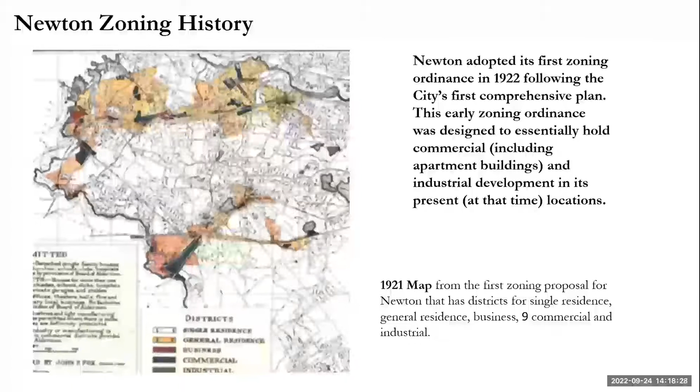Next slide, please. From when Newton's first zoning ordinance was adopted in 1922 through about 1950, Newton's population nearly doubled from 46,000 to 82,000 people. This rapid growth led to two major zoning overhauls.

Phase 2 is where we are today. This phase involves looking at the zoning update proposals that city staff drafted based upon the values identified in phase 1. In addition, the zoning and planning committee of the city council evaluated this and came up with proposed updates, which are the resulting proposals we're going to be talking about in this meeting.

The next step will be phase 3, scheduled for winter 2022. Based upon community input on these updates, zoning ordinance language will be drafted, which will then be considered by the zoning and planning committee. They'll vote on whether to approve this language.

If approved, it will be passed on to the full city council to vote on. If the full city council approves that, the new zoning language will become part of the zoning regulations and be what needs to be followed going forward. So that's an introductory overview to set the stage for what we're going to talk about next.

And I'd like to turn it over to my colleague, Raina Getz.

Hi, everyone. Can you hear me? I hope online you can hear me.

The first step I wanted to do was present some zoning terminology so that everybody is on the same page in terms of what I say, so it's not a question later. We are going to post all of this information so that you can go back and refresh and reinterpret or understand what's being presented.

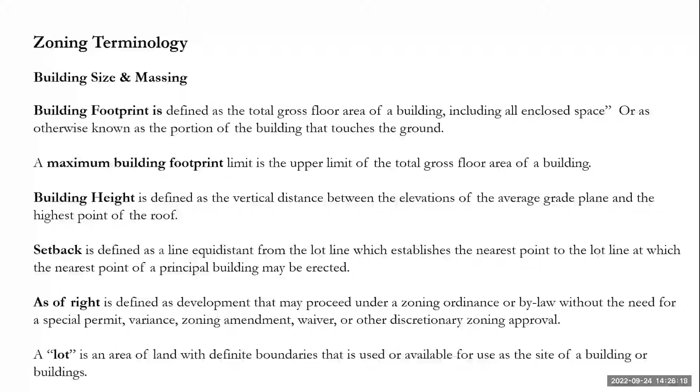As of right is defined as development that may proceed under a zoning ordinance or bylaw without the need for a special permit, variance, zoning amendment, waiver, or any other discretionary zoning approval. And a lot is an area of land with defined boundaries that is used or available for use as the site of a building or buildings. That actually comes from the DHCD definition in the final guidelines.

Another term that's really good to know is floor area ratio. It's the ratio of all building gross floor area divided by the lot area. It's a metric for regulating the number of square feet that can be developed on a parcel without specifying the exact shape or size of the structure. In the example below, it's a FAR of 2.

This means that a building can be twice as much in gross floor area as lot area. I really like this diagram because it shows that this is almost like a form that you can either have long and wide, square, or tall and vertical. So it's an interpretation of what you can do with building massing, but it can take many different forms.

The gross floor area is the total square feet of all of the floor areas in a building plus other floor area that's designated to count towards the total. It's well defined in our ordinance, and it's very specific about what does and doesn't count.

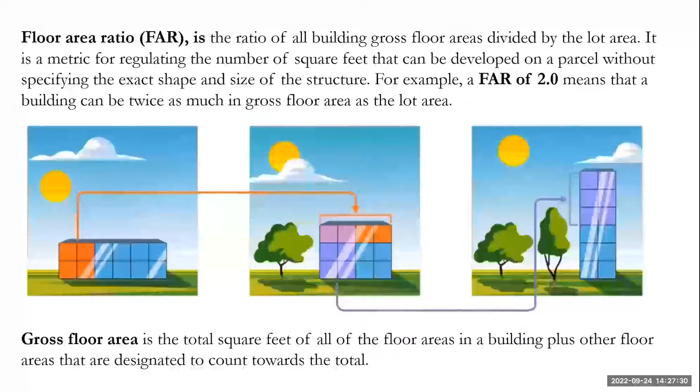The development standards, which we will talk about, determine the overall size, shape, and location of a building or buildings that a property owner can develop on their lot. These standards form the nuts and bolts of any zoning code, and they're meant to promote positive outcomes for the community. Our zoning ordinance is right now under consideration to incorporate these new standards.

They are rules, they're actually our land use laws, and they affect all projects in any zoning district in much the same way. They will regulate the overall building height and mass, but do not regulate architectural style. It basically creates a framework with specific constraints that the design and creative process must work within.

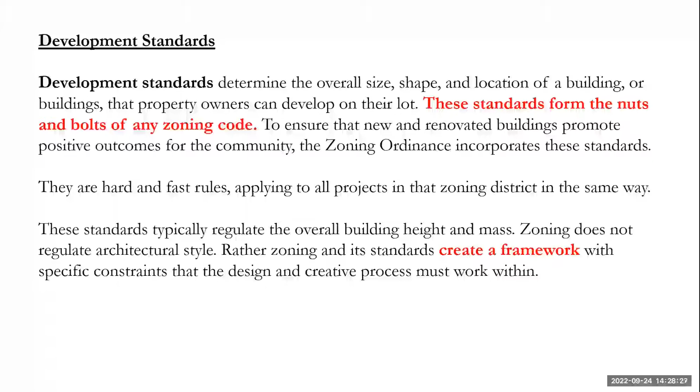So what I'd like to do is cluster each of the proposed zoning framework proposals. I'll first discuss building design, then move on to lot configuration, the review process, and end with parking.

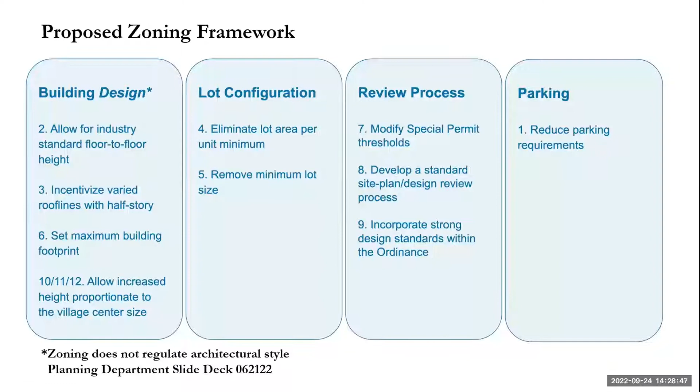The first thing that was considered was getting to an overall industry standard for floor-to-floor heights for residential as well as commercial uses. Currently in your BU1 and BU2 districts, it's a 12-foot floor-to-floor height. What's being proposed is, I thought it was 11, but in the document, yeah, it's here. And in all the documents, it's saying it's 12.

But in the zoning and planning committee, it was 11. So we'll figure that out later. For commercial, it's 13 feet, and for commercial on the ground floor, it's 18 feet.

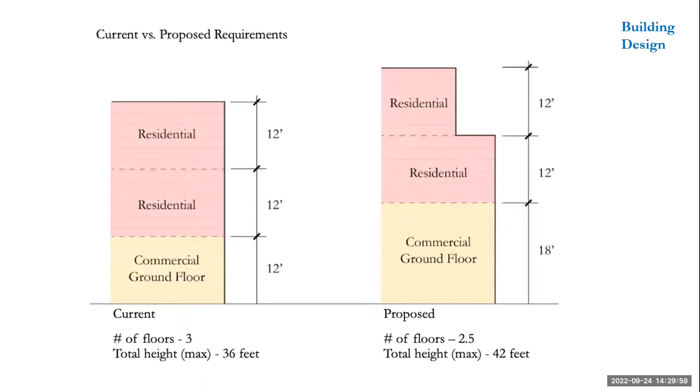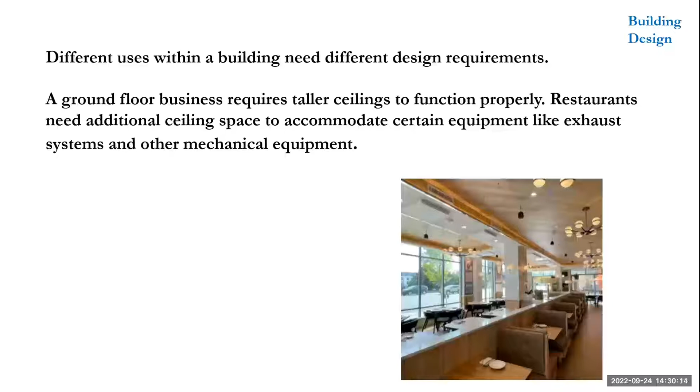Many businesses, many restaurants and bookstores, require taller ceilings to function properly. There's an equipment need, like exhaust systems and other mechanical equipment that needs to be housed up above. So that's the ask for the change.

The next piece, one of the framework proposals, was to incentivize varied roof lines with a half story. They're suggesting that currently in Newton, we have a lot of flat structures, and this is due to the whole numbers of either being allowed to create 2 floors or 3 floors.

So now they're proposing the max height as a half story. It could actually be 2.5 up to 4.5, but it apparently will allow additional flexibility, and it also will allow for a setback.

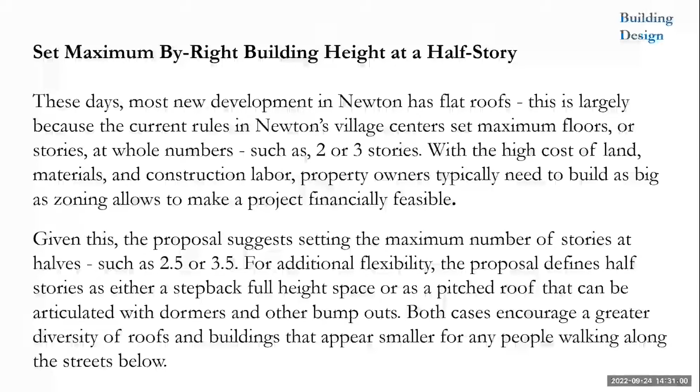This picture actually does a better job of describing it, so you can see this used to be 10, now it's 7 as the setback, and these are all the parameters for a half story, whether you have a flat roof or if it's pitched.

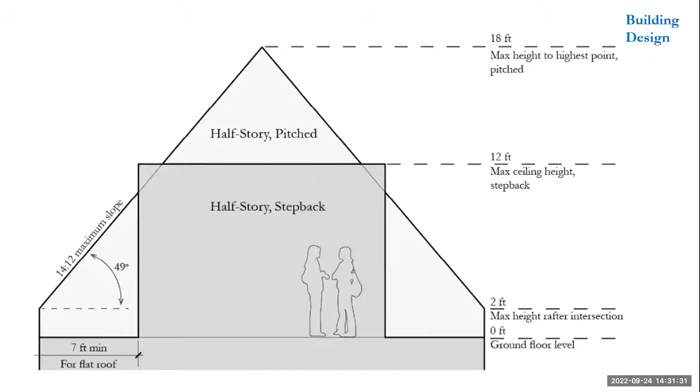This is what it looks like for the BU3 example. It's saying the step back is a requirement. So you can see this is the BU3 example with the first 3 stories at 38 feet and then an additional half story, taking it up to, looks like 50 on this diagram. So it's 3.5 stories.

They're saying that it allows for diminishing the building massing by pulling it in. It's also saying that it allows for more light and air to the street, and it creates a usable terrace space up on the roof.

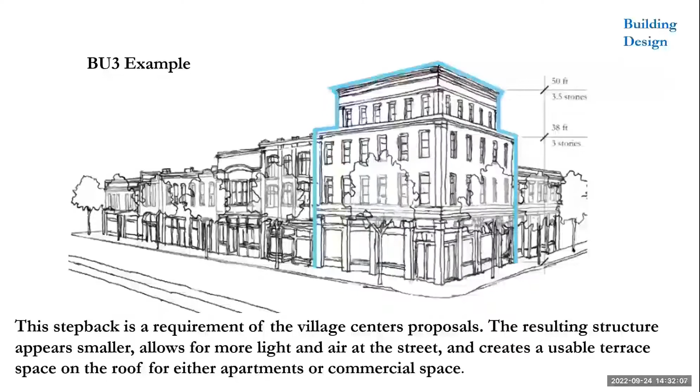So this is what's being proposed: to increase the height proportional to the village center size. And this is a bar chart showing what is being proposed.

It shows that currently the orange is in BU2 and BU1, that by right you can have 2 stories, but with special permit you can go up to 4.

I wish I had a pointer. But what's being proposed is for the BU2 revised district, it's going up to 2.5 by right, and up to 4 stories by special permit.

Now, in a medium village center, you can have both the BU2 and the BU3, and the new residential district will allow a by-right structure at 3.5 stories high. And then lastly, the MU4 will allow the BU2, the BU3, and the MU4. You can see that the allowable by-right height, story height, is 4.5, and then by special permit it can go up to 6.

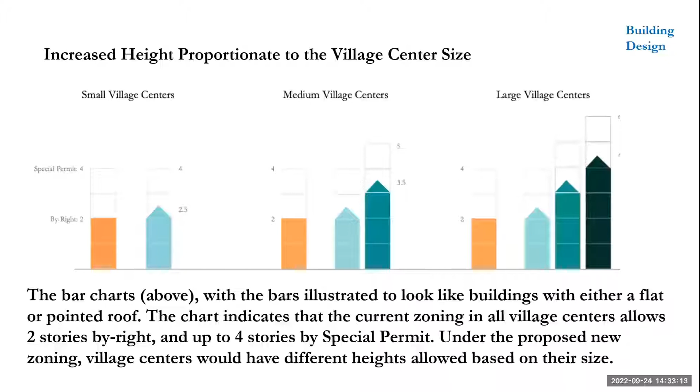6 stories - oh, sorry, 6 feet. Thank you, and I want input.

No, I'm just saying, Pam Bright is right here next to me, and if I say something that doesn't sound right, please interrupt. She's on the zoning and planning committee. All right, just so everybody knows.

You might also want to talk about which village centers are coming in. All right, so the proposal is to create 3 new village zoning districts, which will establish a zoning framework.

This framework allows for small, medium, and large scale development appropriate for the size and attributes of each of the village centers. I'm going to go through each of them specifically, but you can see when I talked about FAR allowable, now that the BU2 and BU1 has an allowable by-right FAR of 1.5.

So the smallest ones with the BU2 revised zoning district - this is currently, from the city's planning department documents, designating 4 Corners, Newton Upper Falls, and Newton Lower Falls.

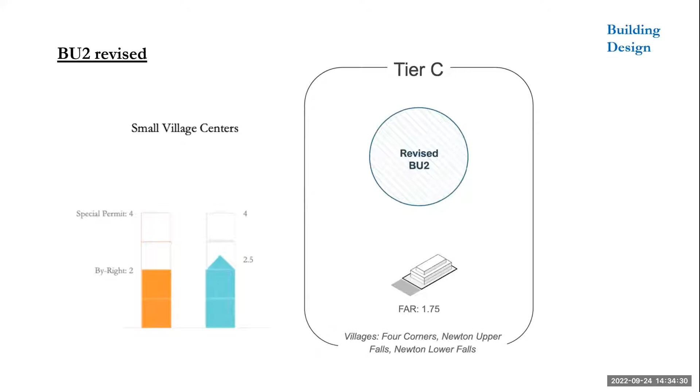And this is what it looks like in terms of the schematics coming out of the documents. You can see the by-right development is 2.5 stories, with the building footprint identified, a maximum building footprint of 5,000 square feet.

To understand this a bit, we have not been given any other dimensional controls like setbacks. This is a maximum. So what's going to shape the building in terms of its footprint would be other dimensional controls like setbacks and also open space requirements. Those haven't been identified yet, so we are kind of in a suspended state about those.

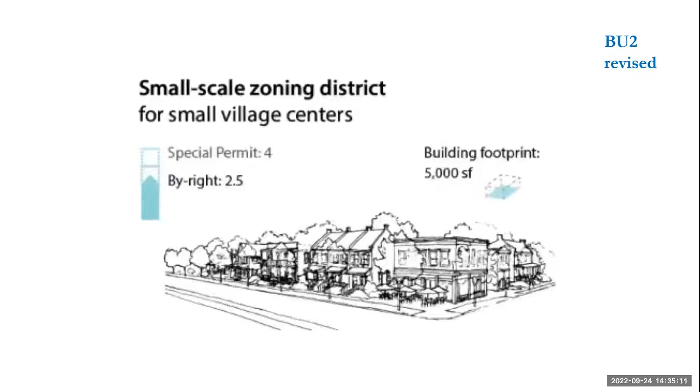Okay, here are some images that they presented in terms of by-right. Here we have our strong block, which is an old 2.5 stories. What's wrong, you can't see anything?

Okay, here's the BU3 revised, and we have a new residential district right here in the darker turquoise with additional FAR heights of 2 and 1.75.

And the villages that have been identified to have both the revised BU2 and the BU3 would be Nonantum, Highlands, Auburndale, Waban, and Thompsonville.

Just a question - no, can we hold the questions till the end, please? No, that's right, good question for clarity.

Okay, and we can look at the city council here. Are the maps of where they're actually proposing this available? Because I just did a survey this week, and they're asking citizens where we think this should be, so I'm a little confused by what you said.

So they just repeat this question so they can hear it. Okay, so I think that - do you want to restate your question, Mr. Powdermaker? Yeah, so this is Dan Powdermaker.

I was unaware that there actually was information from the city about where they are thinking about making the various villages. The survey that's available to citizens is actually asking us as residents where we think it should be, and I just did it this week, so is this map actually available, or are we speculating?

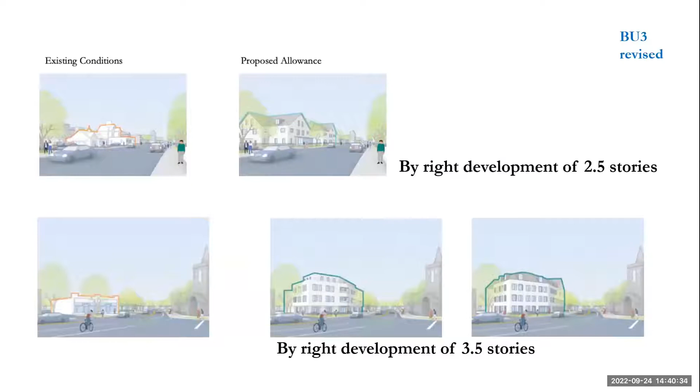This is a descriptor of what by-right development looks like in the planning department documents, 2.5 versus 3.5, shown in orange versus turquoise in the schematics. The BU3 revised has a maximum building footprint of 10,000 square feet, so you have your BU2 and BU3 by-rights. In this village, the BU3 will allow—the special permit process would allow a 5-story building.

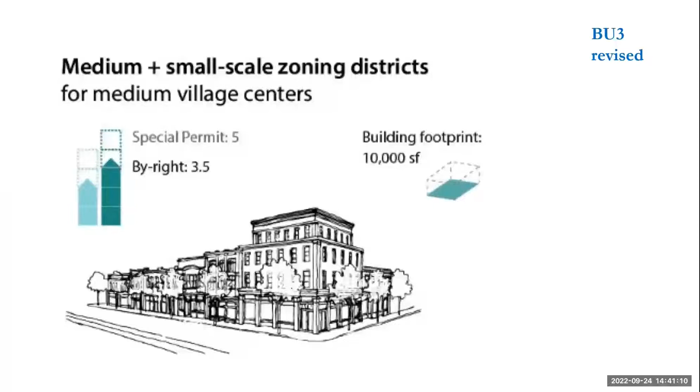Let's skip this one and go to the MU4 revised. The village centers identified preliminarily in the zoning and planning committee meeting were Newtonville, Newton Center, Newton Corner, and West Newton. Now we have an MU4 district at 4.5 by right and special permit up to 6. Here are the schematics of what that looks like, the bottom two, but you can also have the BU3 and BU2, the upper one.

Let's go down to what's at the library. Let's keep going, next.

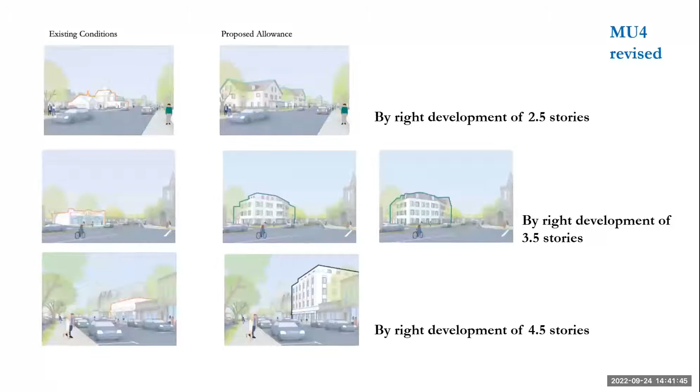This shows how additional height can reduce the overall cost of housing units. This is another piece we need to talk about, inclusionary zoning ordinance. The MBTA Communities Act has a bit of an override on this, but at this point, just know that more units means more deed-restricted units, and if you go up, you can put more units on a lot. Comparing the two formats here, there's a fourfold increase.

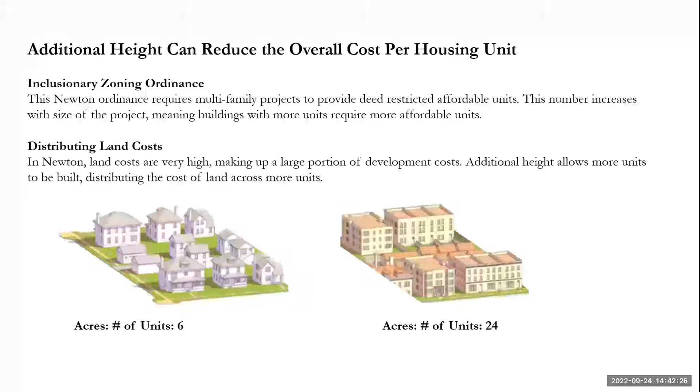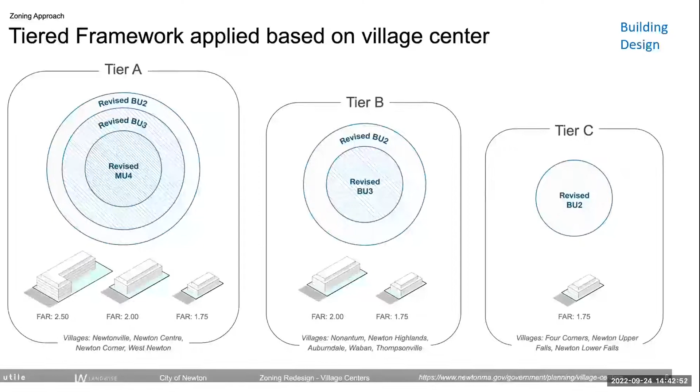Overall, next is the summary slide about what's allowed in each district, going from right to left: the small, tier C; the middle, tier B; and the last, the largest, MU4 as tier A. You can see the increase in FAR, and also the number of stories. This next one is good because it has it all on one page, showing the existing allowable floor heights, the footprint, and the FAR values.

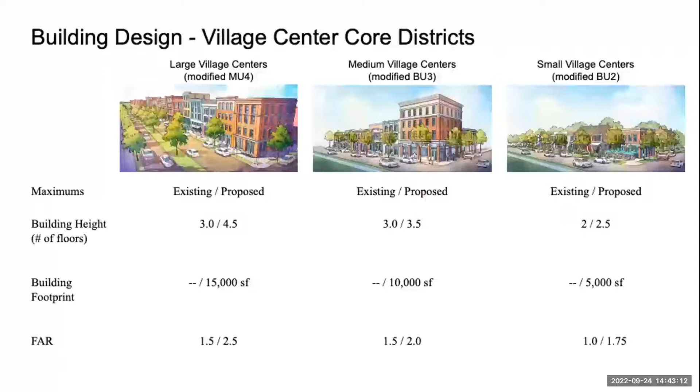Okay, by right, this is all by right numbers. And this is another schematic with more specifics in it to review at your pleasure.

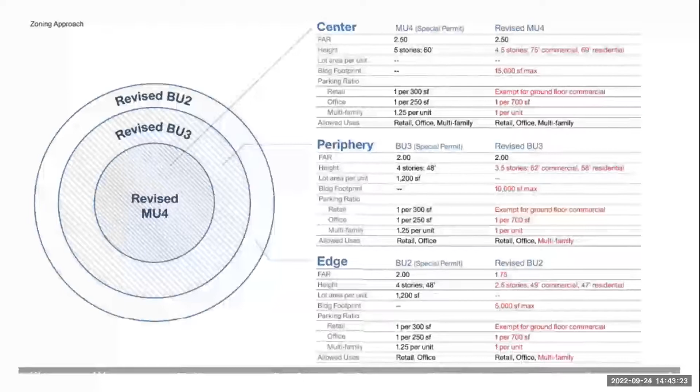So let's go into lot configuration. All right, so they removed the minimum lot size. This is another grouping in terms of zoning proposals 4 and 5. The first one, number 4, was eliminate. This is actually number 5, remove minimum lot size.

Right. Okay. All right. But what they're also saying for Trio in Newtonville, they had to aggregate the lots in order to create the building that they wanted.

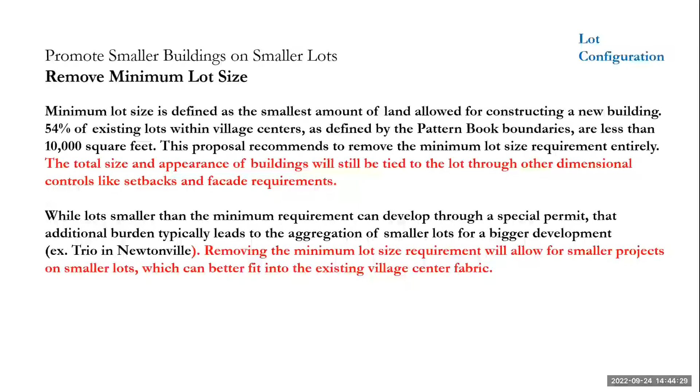So stop. So the other thing for the lot configuration proposals was to eliminate the lot area per unit minimums. So in the current proposal, it's being eliminated. What it's saying is that by doing so, you will have the ability to put more units into the structure.

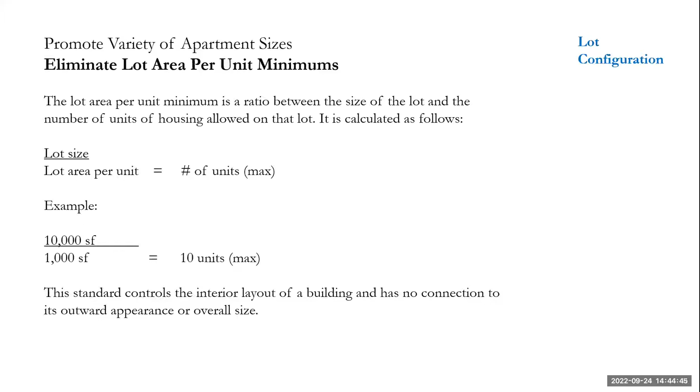Okay. And this is the next point - the lot area per unit is one of the multiple existing standards that control density. Floor area ratio, the FAR that we talked about, is another density control. However, these two density controls are not linked, which leads to a disconnect between the overall size of a building and the number of units contained within. And that's an important concept to hold on to.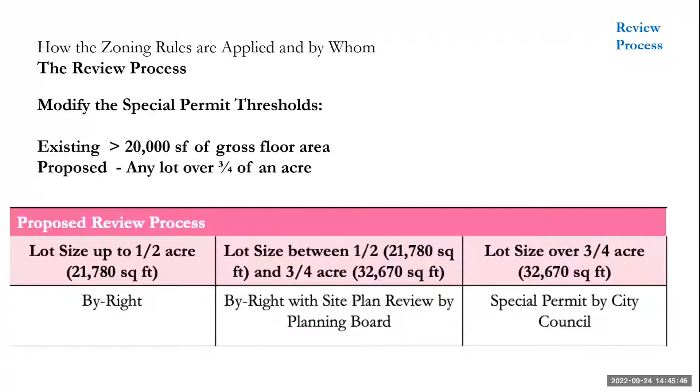Okay, and then finally, incorporating strong design standards within the ordinance. This is important because design standards can help establish clear and consistent criteria, applied consistently. They utilize a common vocabulary of terms and concepts through diagrams, charts and images, and they provide practical guidance with clear expectations for property owners, designers, and community members.

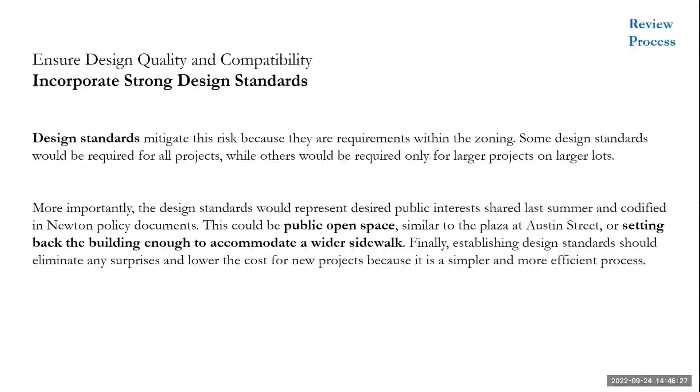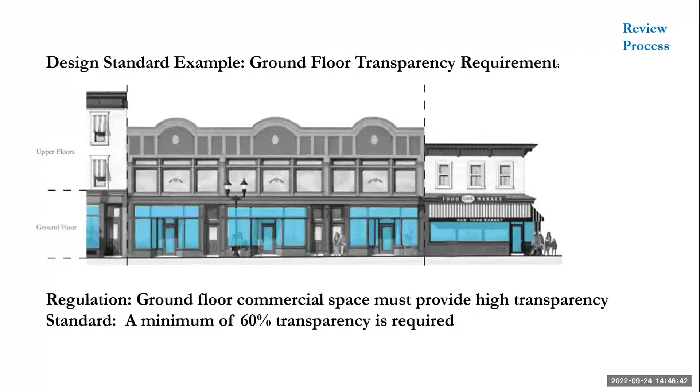Okay, and then the next piece is showing examples. This is a regulation that the ground floor commercial space must provide high transparency, with a minimum of 60% transparency required. And here's some Watertown examples.

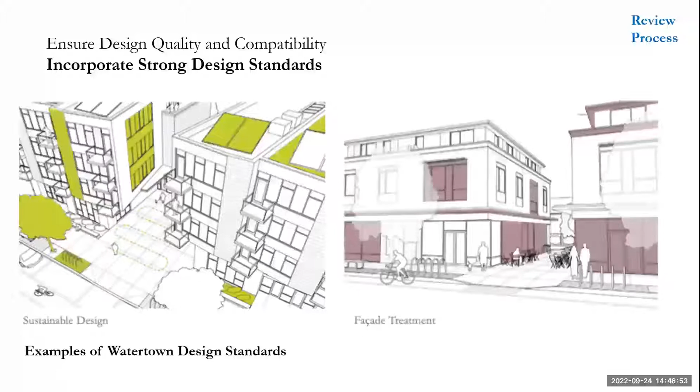You can make the design standards consider sustainable design, a facade treatment. It can also control the public realm and open space, or parking and access.

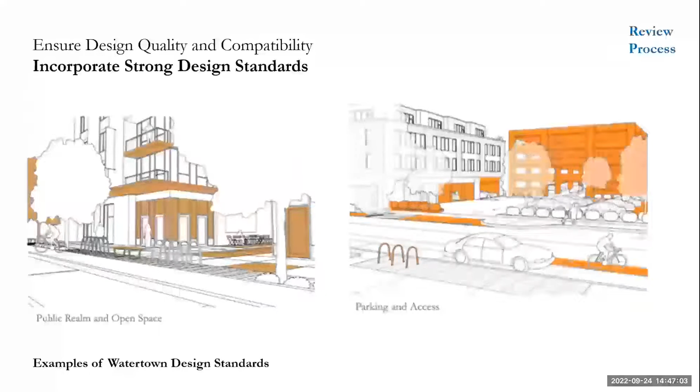Okay, and then lastly, let's talk about lower parking requirements. These are our local laws that require private businesses and residents to provide at least a certain number of off-street parking spaces. It's based on the individual use.

An example is new apartments. You can require a number of spots for residents, and new businesses for their expected customers and employees.

And this is the first time we're seeing more specification about the use and what's required in terms of parking requirements, so this is something you can review later. And then the concern, next slide, is - where is everybody going to park?

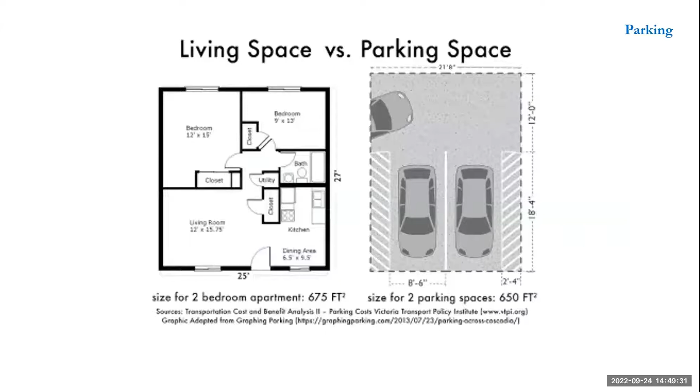You can see that there are possibly other transportation options, depending on where we get with the commuter rail and the T. Another really important point to consider is that your parking space can become living space, and with the accessory dwelling unit conversation right now, this is something to think about.

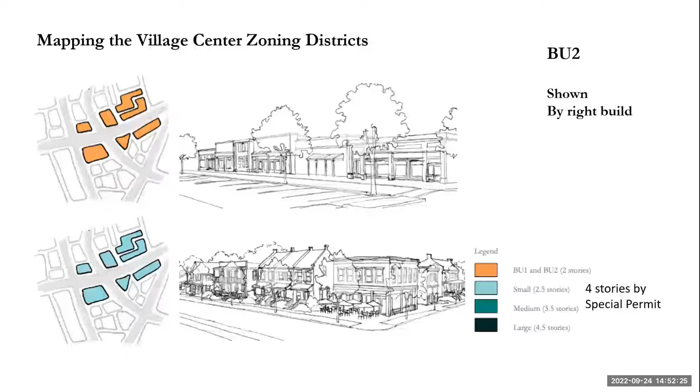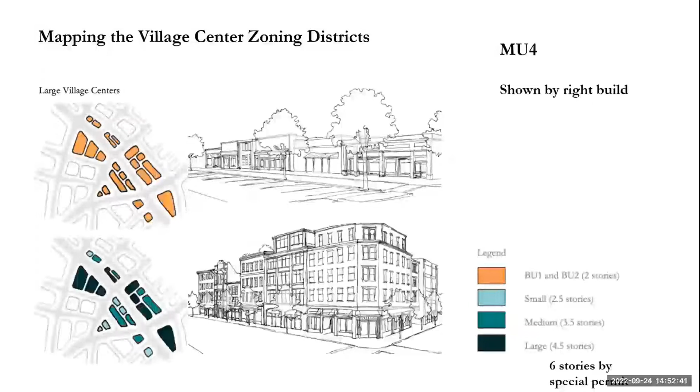Okay, so here's what they're doing, this is up at the library. I don't know if you guys have seen this, but it literally looks the same. The orange is what's existing and the blue is what's being proposed. So it hasn't bled out into the community, it's staying within the framework of those defined village center boundaries. If you flip through, it's the same for each one. We haven't had any presentation to date of anything outside the framework defined by the pattern book. This is what's up at the library right now.

Okay, so let's talk a little bit about mapping in the MBTA Communities Act. This is actually something zoning and planning is going to consider this coming week. I'll just do a high-level fly-by since we still have information yet to gain from this process with the city. But if you read this, it was part of the economic development bill signed by Governor Baker in 2021, requiring zoning for a minimum gross density of 15 units per acre.

That designation must not have any age restriction, it needs to be suitable for families, and within a half mile of the T or commuter rail. We are considered a rapid transit community, the highest designation, so we need to provide zoning for 8,330 units. Each zoning district needs a minimum land area of 50 acres, and 90% of those designated areas need to be within a half mile of the transit location.

Sure, I'm gonna go, all right. So,

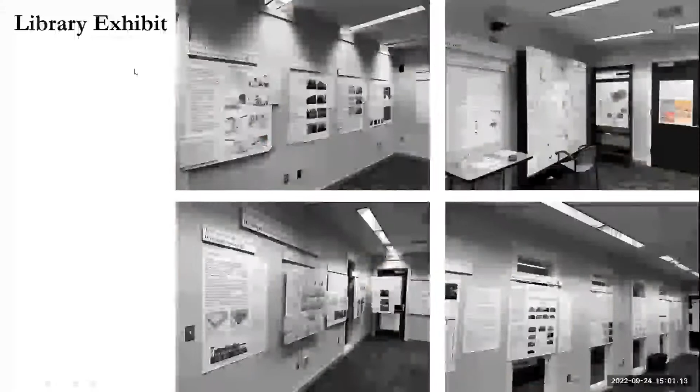So it takes up the entire room. As you come into the first part, you see on the upper side there's a map. This is the map they have up, showing the pattern book definitions of the village centers.

And these are the people who have gone to see it. It's not really clear whether you're supposed to put your pin on where you live or what village center you identify with, but everything seems to be clustered in the village center, so that's what people are interpreting to do. We have a lot of representation there from the village centers represented here.

So that's good. If you go to the exhibit and don't really understand what's happening and want someone to help you walk through it, they've provided docents from the planning department stationed at the library, and they will help walk you through all the pieces of the exhibit.

The next one coming up is Wednesday the 28th, 9 to 11 in the morning. They have one evening slot left for people who work, on the 11th of October. So we only have a couple more times for the docents before October 16th, 2022, which is a very important date.

That is the last day that you can fill out the survey. So we're halfway through the process. We only have a couple weeks left, but you have to remember October 16th, because that is the day they're going to turn off the survey tool or stop collecting information.